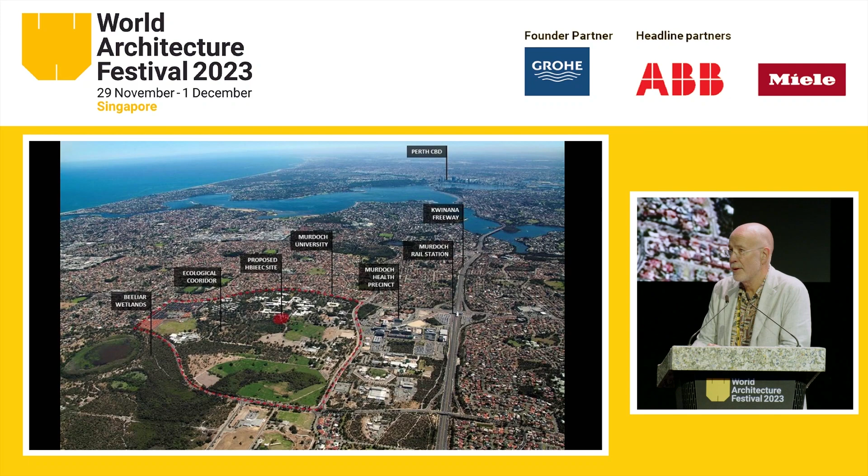It's a project for a public university in Australia called Murdoch University, and the site itself is what in colloquial terms in Australia we call a bush campus, built on the fringe of a city in landscape.

In fact the project was built almost exclusively at one time during the 1970s by a single architect, as a series of linear buildings within that bush landscape.

We were invited to speculate on 3 things within the project: firstly, how to accommodate new teaching and learning spaces for students, both local and international, that would secure the future of the university, and also deal with some intractable issues with the campus.

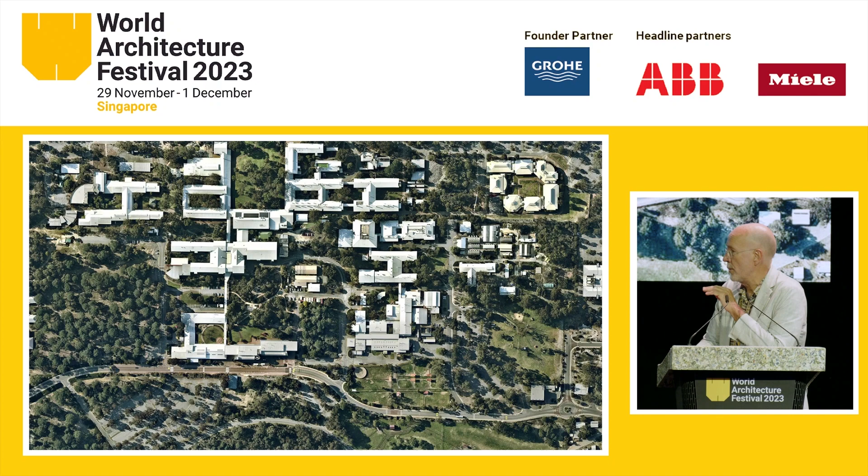As the city has migrated towards the campus, the public transport network changed, and suddenly students are arriving at what used to be the back door of the campus, a 14-metre rise from that arrival point to the centre of the campus.

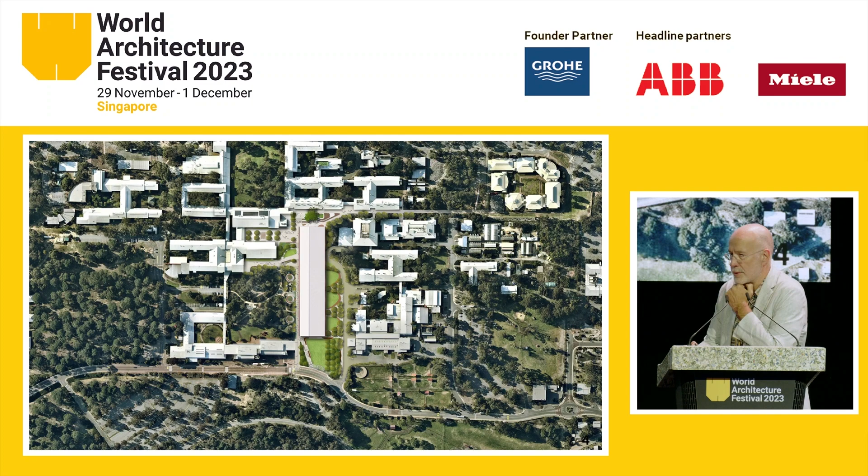So we proposed a nearly 200-metre long building, which amplified the idea of the existing linear typologies on this campus, literally stretching the building to connect the centre of the campus to the new arrival point, and also dealing with a series of transverse connections that link the campus together in the cross direction.

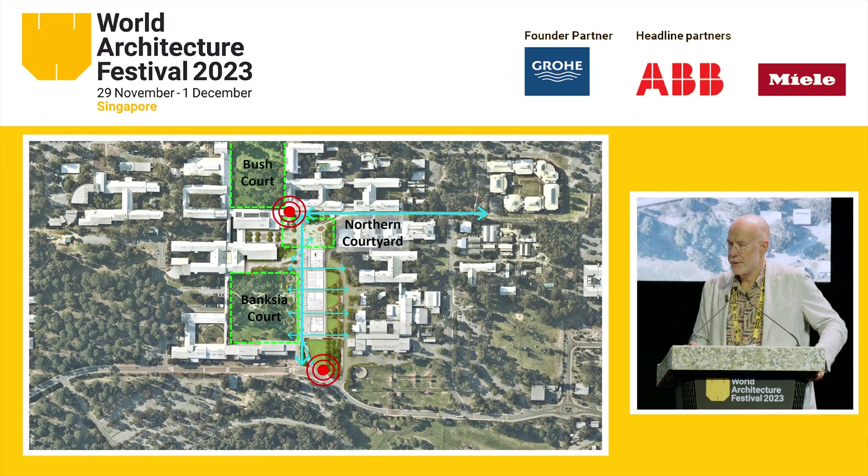I'll talk about the project in 3 parts. Firstly, the project is like a large bit of public campus student infrastructure connecting the campus from the centre to the edge. But it's also a building with very intimate teaching and learning spaces where students can work together, and we've brought the idea of biophilic design directly into the project through a mass timber structure.

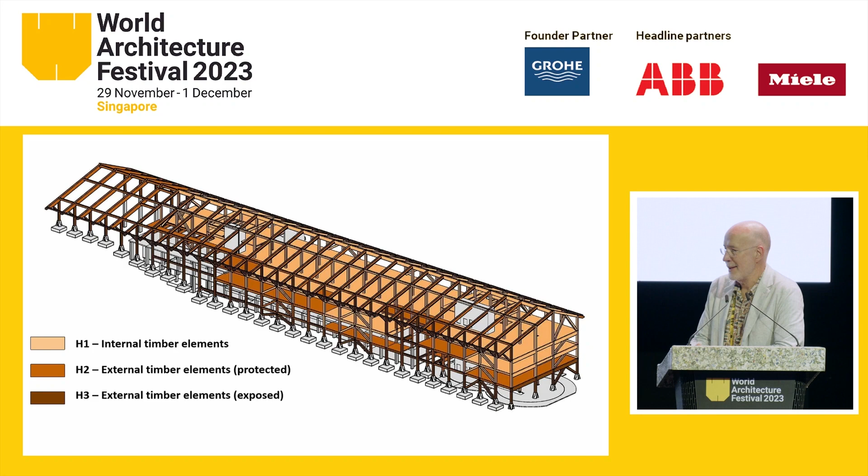So in a sense, the project, which sits on a concrete base, is an idea of 31 repeating 6-metre bays of a mass timber structure. It's like a big warehouse for students to learn within.

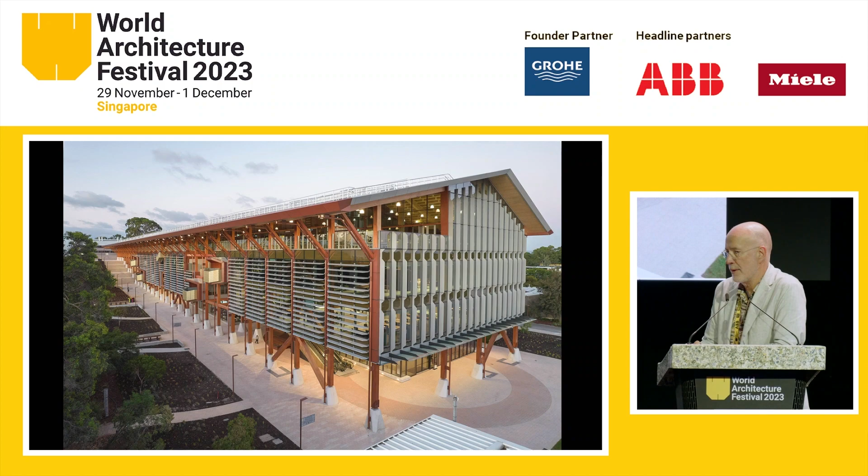You can see in this image the idea of connecting the centre of the campus to the new arrival point, and that very significant rise of levels on the left-hand side, and also in this view. So when you now arrive on the campus, this is what you arrive to.

We expanded the idea of an existing architectural language on the campus, which was for these supported propped eaves, and made that into a more monumental scale that suited recreating the arrival point into the campus for this university.

As you then step into that space, you can now arrive onto the campus under cover for sun and weather protection, or you can divert into a more protected colonnade you can see on the right-hand side of this image.

Alternatively, you can not pass by the building but simply engage with it and the vertical circulation systems within it, providing universal access through the building into the centre of the campus, and into all of the teaching and learning spaces within that project.

You rise up into the building, and then you can pass through it, circulate through the teaching and learning spaces into the campus, and arrive into what is the traditional centre of the campus, designed in the 1970s, called Bush Court.

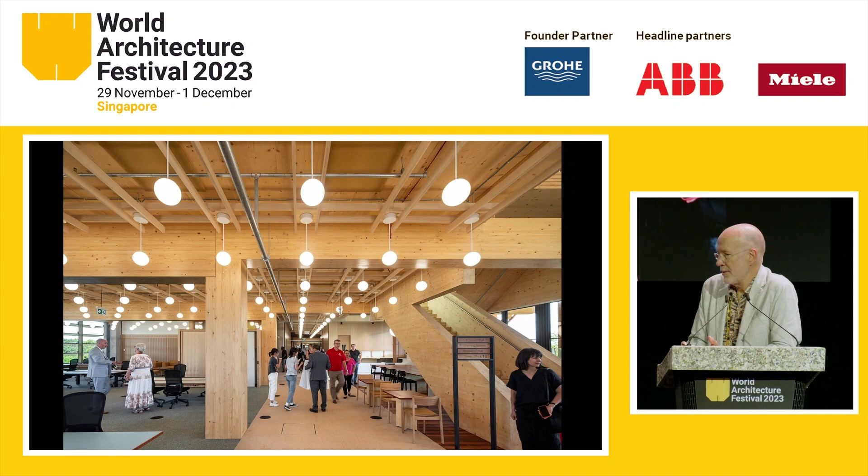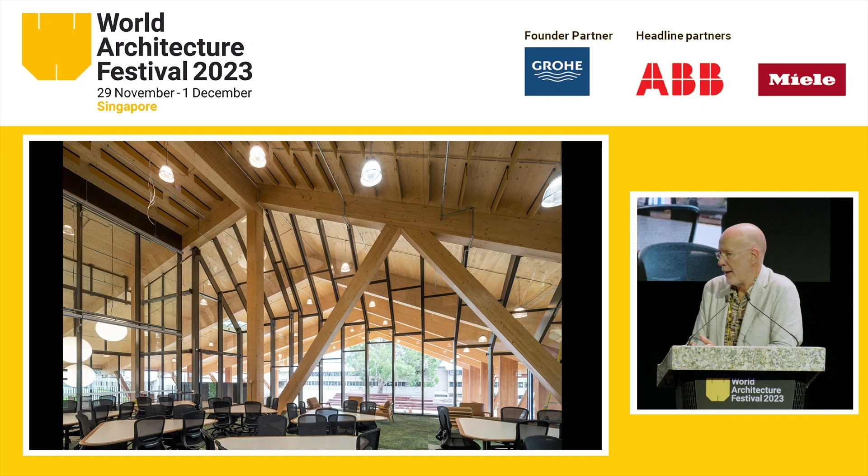To the left-hand side, to step into the building, into some of the student spaces. Firstly, there are spaces set aside for delivering student services, ranging from paying library fines to engaging with support for international students in a very intimate, one-on-one space. That's connected with a space which can flip between student use and teaching and learning, and looks back out onto that large undercover event space.

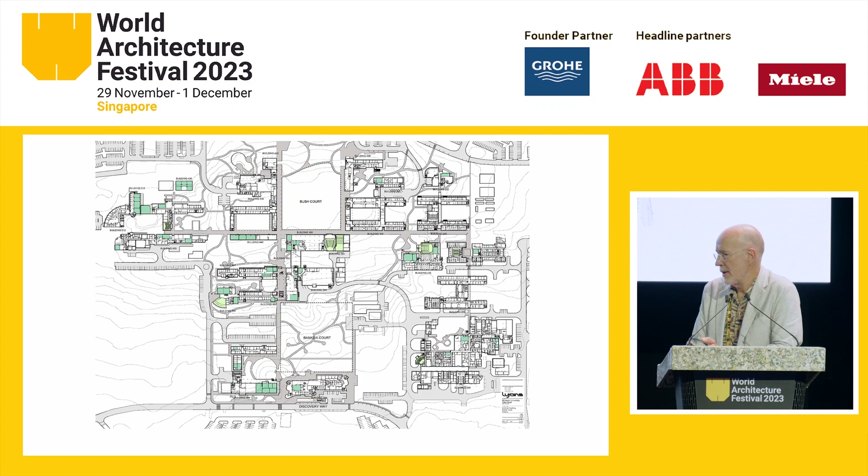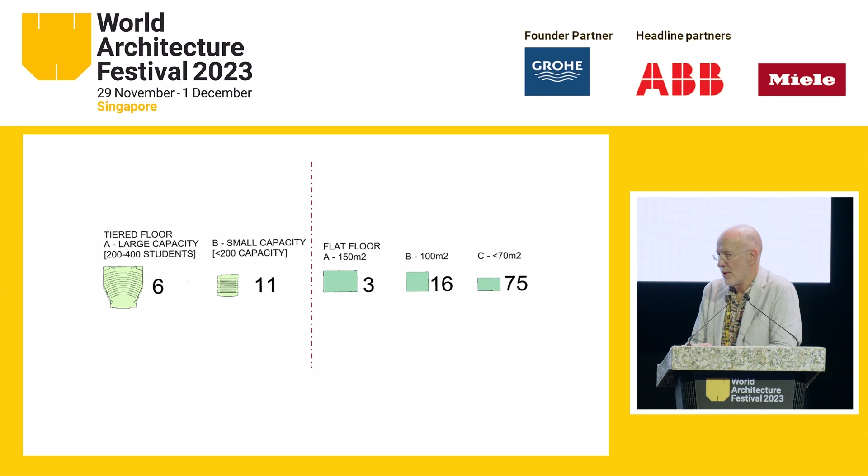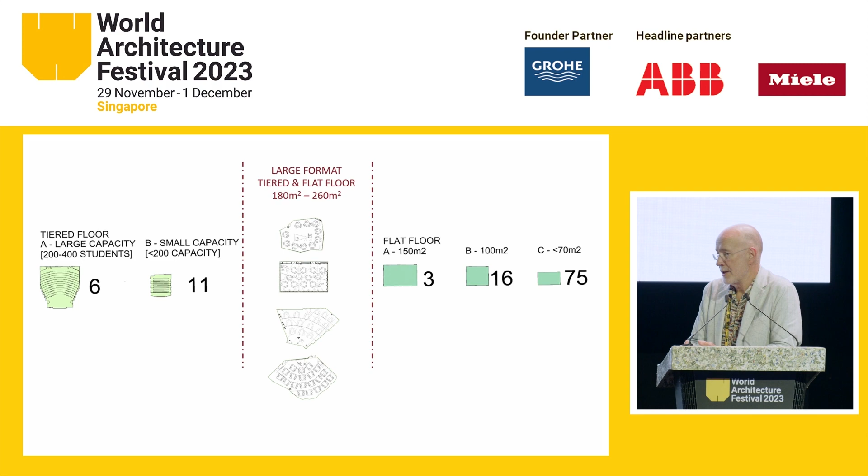Before we were even invited to do the design work on the project, we were asked to do an educational brief, and we looked at the 1970s buildings, which are very narrow, where teaching spaces were largely traditional large lecture theatres or small tutorial spaces. We proposed that the building would have a series of larger scale spaces where students can work collaboratively together in a large format series of teaching and learning spaces.

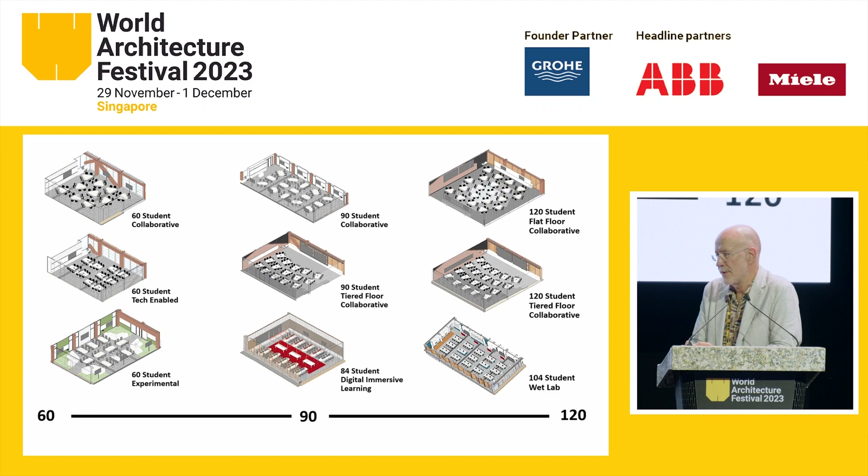So we developed a series of spaces conceptually where students can be accessing technology or avoiding technology in terms of the way they learn together. Again, these are students that are both local and from all corners of the globe working collaboratively in sizes which are unusual, of 60 students or 90 students or 120 students within those single buildings.

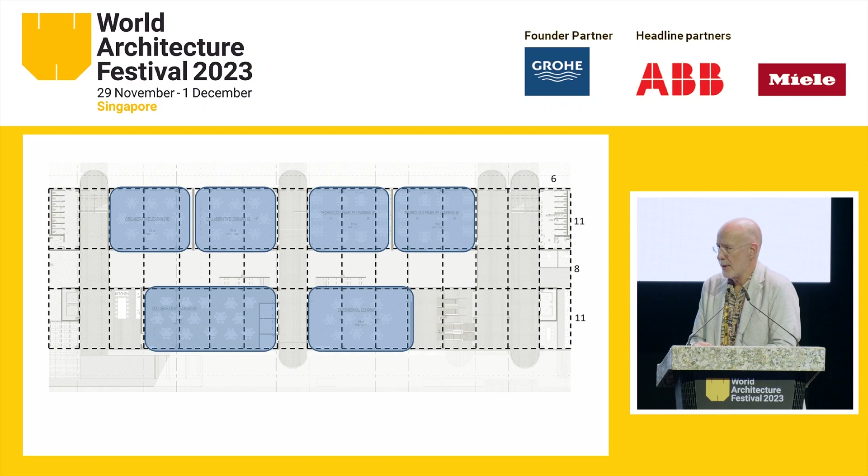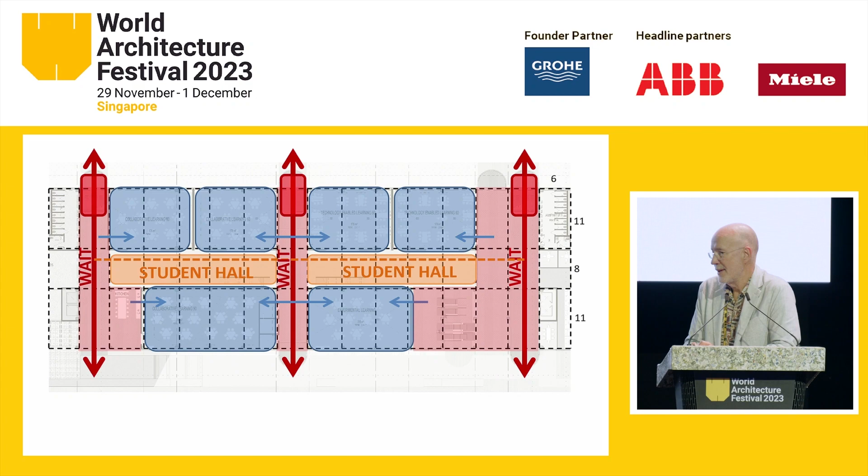So it's a pretty simple linear plan for the project, but if I close up into one central section of that, within the repeat 6 metre timber grid, we're able to accommodate these formal teaching and learning spaces, accessed from more social student spaces, which are both naturally ventilated and also can use tempered air. Between those, a series of what are called student halls, where students can hang between classes and do informal learning activities with their peers before they attend more formal learning activities.

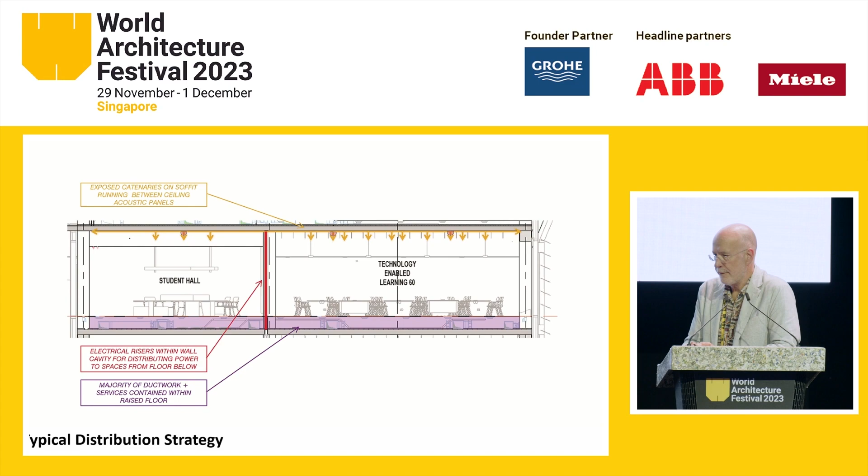To reduce the energy footprint of the project, we put all the air delivery systems in an underfloor system, so that within the space itself, in doing a mass timber structure, we really permeated the idea of the timber, from a biophilic design point of view, for the student experience.

This is a typical teaching and learning space where students can congregate and do work around tables of 6, or they can sit across a corner and pair up and do teaching and learning, or indeed as a whole larger scale class using technology as well, in more technology enhanced spaces.

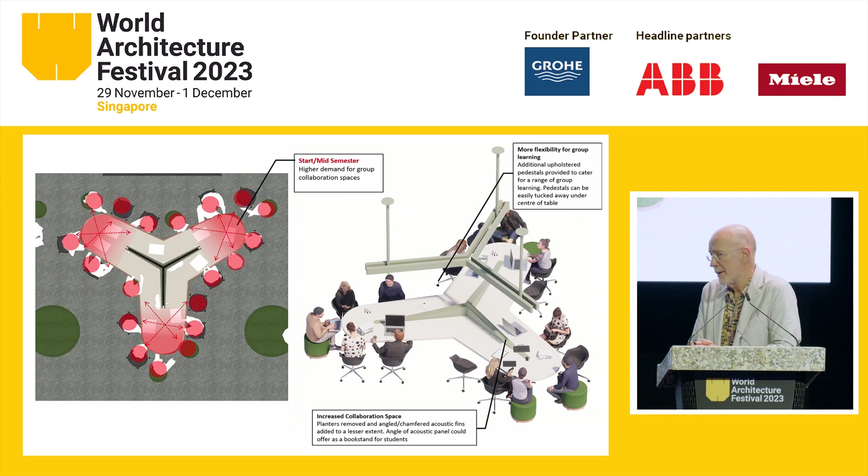These are the student halls. Again, these were designed in a way where students can, at the start of a learning year, work more collaboratively, and as it gets closer to pressure time and exams, there's enough space in the setup that they can do individual study within those student halls. And from that, you can migrate into more social spaces.

These are places where students can chill out with digital technologies. We commissioned through the university a series of First Nation artists to do digital artwork that go into these spaces, and other social spaces which are more like external picnic areas that connect to student kitchens, which again can be naturally ventilated, and you can also connect and break out to a series of external balcony spaces, which from the outside is like a network of student spaces that are easily identifiable and easily accessed via the vertical circulation systems.

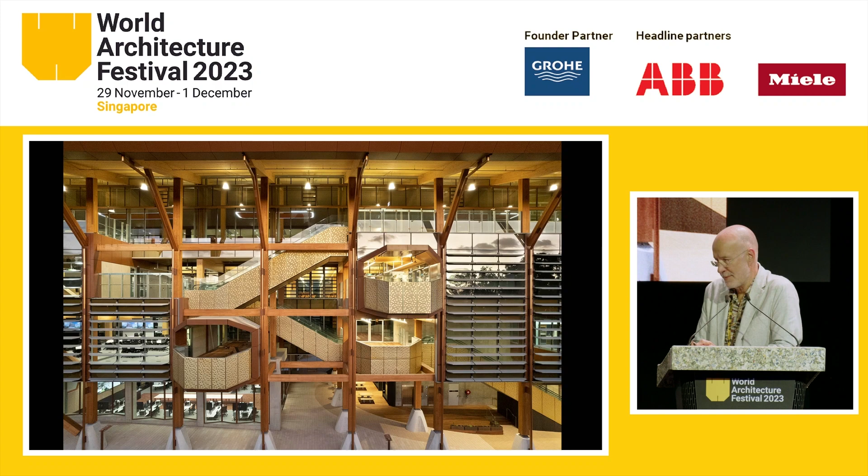And when you go up to the topmost level, within this idea of a really simple, large, broad roof, which provides deep shade in summer and weather protection during winter, students can either sit outside for their learning activities under that deep roof, or step inside into other informal learning spaces to work with colleagues, or from there step into some of the larger format teaching spaces, which again can be set up for didactic learning with someone running learning activities within that space.

Or they can be more group learning using technologies. And the last couple of slides to say the design takes advantage of the simple gable roof to create these beautiful teaching and learning spaces that reconnect back out into that bush landscape towards the edge of the city.

And that also gives an opportunity with this extraordinary roof to do some other significant things from a sustainable design point of view, with about a 500 kilowatt array of PV cells on the roof, which allows the project to achieve roughly 90 to 95% reduction in its operational energy use, and with the use of things like the mass timber structure, a very significant reduction in excess of 50% of the embodied carbon within the project as well. So, thank you.